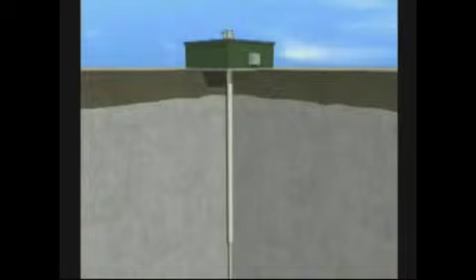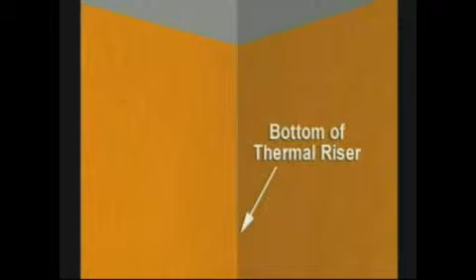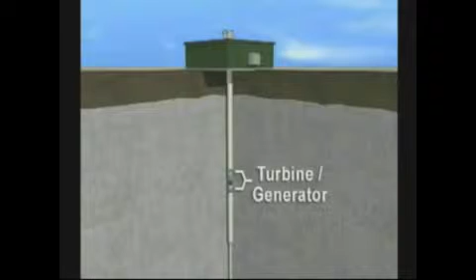The Argus A1 device is comprised of two closed-loop circulating circuits. In the first, the heat is brought to the surface from the depths of the Earth by a patented thermal riser. In many parts of the world, especially those in areas denominated as the Ring of Fire, the temperatures required to operate the power tube are closer to the surface. Therefore, in many cases, the thermal riser is not required. The required minimum temperature necessary is 300 degrees Fahrenheit or 148 centigrade. The power generating system operates at 10,000 RPM and needs only 225 degrees Fahrenheit or 108 centigrade.

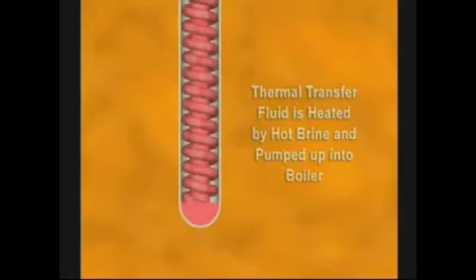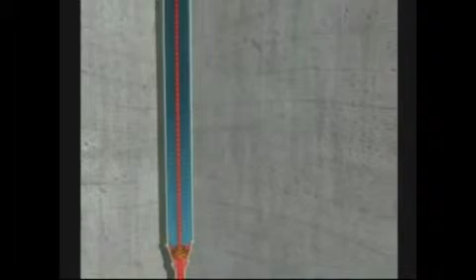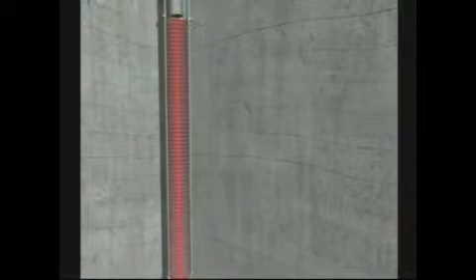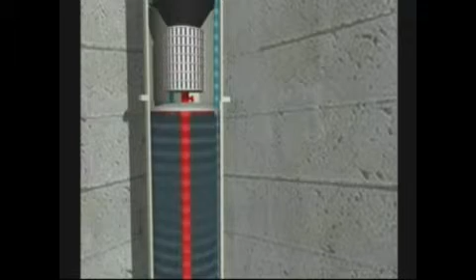The resource temperature is higher than the operational temperature when you take losses from the heat transfer into account. The heat loss is a factor when you are transferring heat from one source to another. The heat from the thermal riser is transferred to the heat exchanger. This is the start of the second closed circuit cycle. The heat exchanger contains 6,600 feet of specially designed stainless steel tubing, which contains a formula of isobutane isopentane liquefied gas. The tubes in the heat exchanger are bathed in heat exchange fluid that circulates down to the bottom of the thermal riser and returns to the heat exchanger, completing a heat transfer loop.

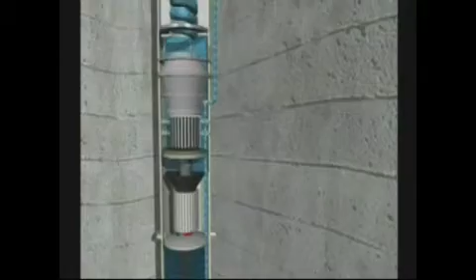As the throttle control or valve opens to release the compressed liquids into the turbine chamber, they become a gas, which propels the turbine, which is directly coupled to the generator in the monocoque turbo generator system. This creates the power. As the gas leaves this monocoque turbo generator system, it goes through the condenser system, the first, second, and third stages.

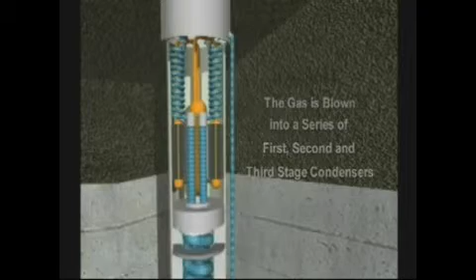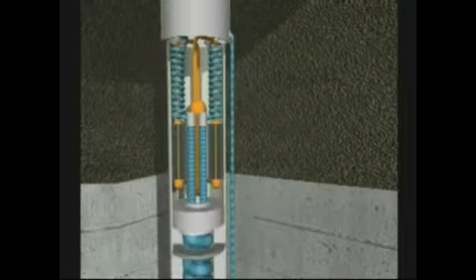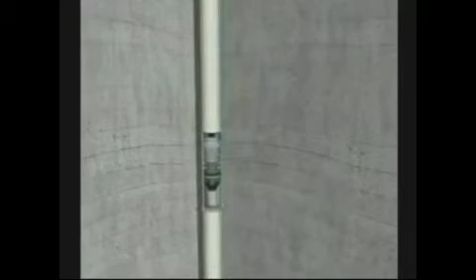In certain cases, an additional condenser, or the SCCD, called the supercooling condenser driver, may be used. The SCCD operates by compressing a gas, much like a refrigerator works, but instead of the standard motor or turbine, it uses sound, which eliminates moving parts and requires a lot less energy. After the gases are cooled and transferred to the equalization tank, they are then pumped back to the heat exchanger, where they start their closed circuit journey again.

The surface footprint of a 10 megawatt power tube is only 10 meters by 10 meters by 3 high. There is no pollution, no use of water, no aquifer contamination, and no unsightly structures, and the installation is rapid.